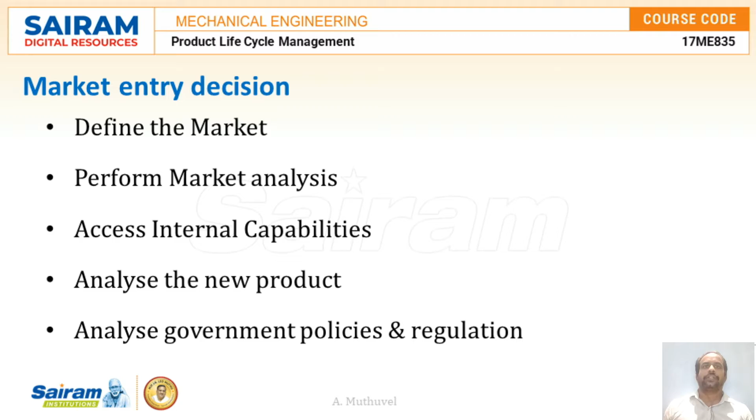The following are various factors to be considered by the managers when making a decision for entering the new product into your domestic market. First, we will discuss defining the market. That means who is your customer, what you are going to sell. So that factor has to be defined properly.

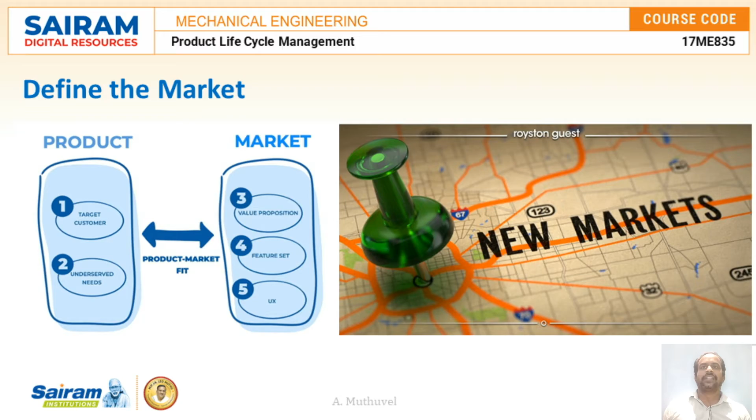Defining the market implies identifying the market in terms of location, having a suitable population with a large middle class representation and income level above the national average, people's characteristics, their needs and wants, educational backgrounds and other necessary information for promoting products. So this step is critical because the information that appeals to one particular sector of the population may not be as effective with another.

Now we are going to discuss performing market analysis. Expanding into a new market involves a great deal of market research in addition to target customers. There is a need for an in-depth understanding of market growth rates, market size, forecast demand, existing products and level of competition, distribution and supply channels, advertising channels, potential risks and barriers to market.

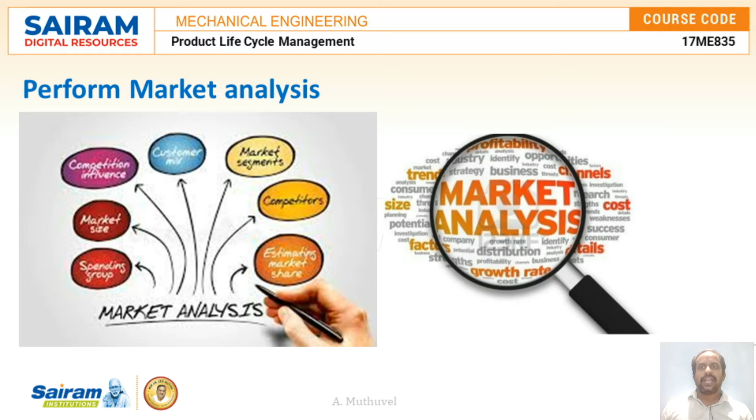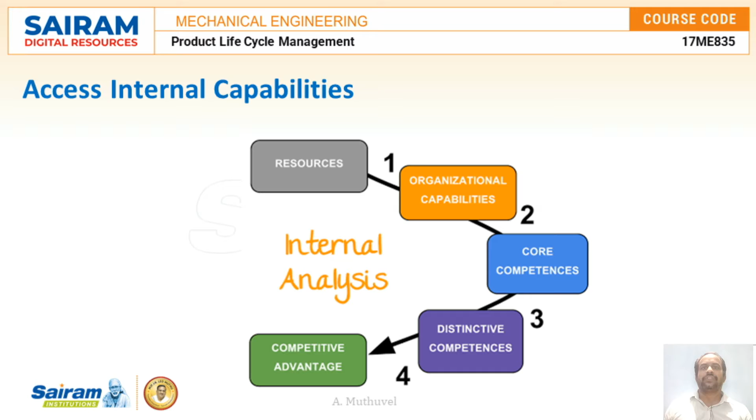Now we are going to discuss assessing internal capabilities. Much of your decision on how to enter a new market is driven by an internal capabilities assessment. There is a need to analyze the existing financial situation of the company and future requirements, human resources with skilled and efficient people, existing infrastructure and future requirements, company presence and association with the distribution supply chain, getting associated with a joint venture or partnership and so on.

Now we are going to discuss analyzing new product development. There is a need to compare the features and functionality of the new product with those existing in the market, modifications if any to overcome the limitations of the existing product and attract new customers, the overall cost of making the product, and fixing a competitive product price along with product discounts or offers, if any, and so on.

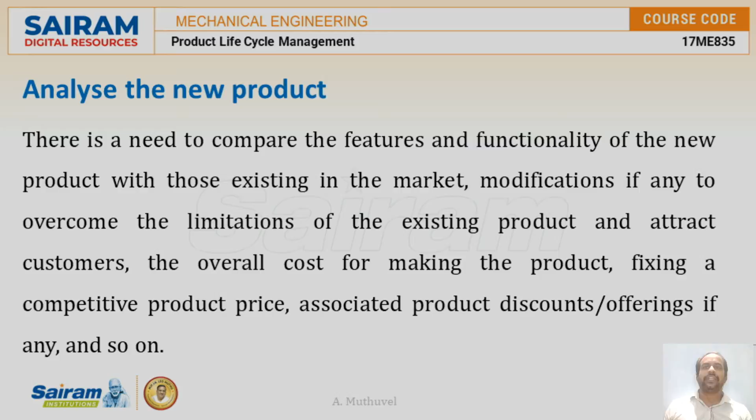Now we are going to discuss government policies and regulations. Government regulations can very often create barriers to your business at the entry and growth level. Companies need to examine the implications of such regulations prior to committing to market entry. Now I am going to play a small video for your better understanding.

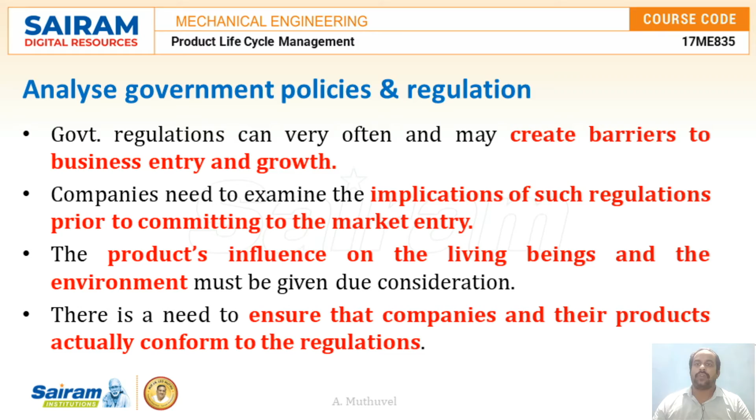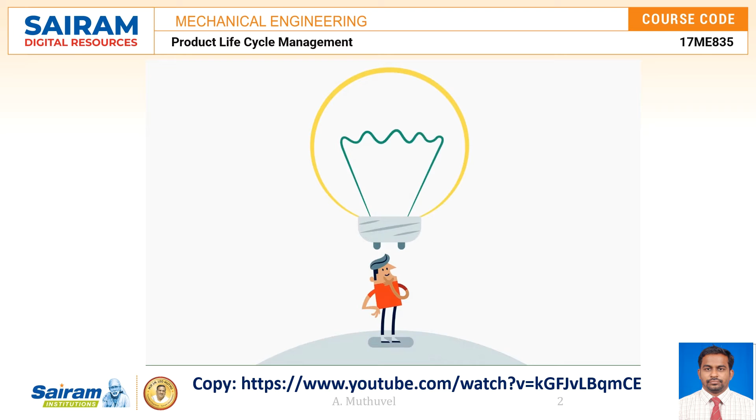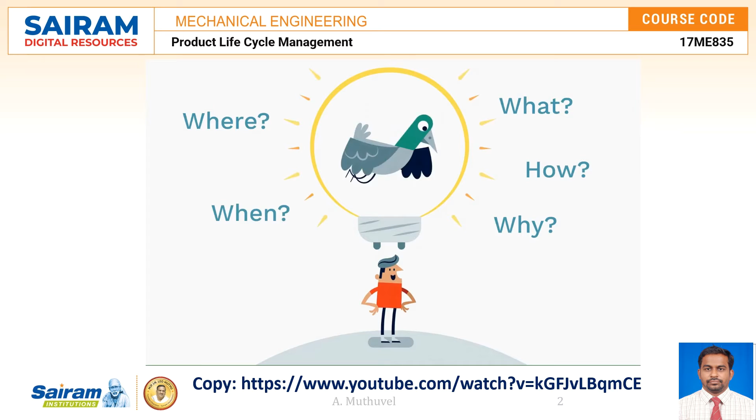Product development consists of several phases, all equally important and exciting, and all with the goal to create something new. A product always starts with an idea, followed by important questions like why, where, what, when, and not least how. When the concept is set, it's time for research and analysis. We will help you identify the challenges, growth potential, and compliance of your product. When all parameters are set and analysis complete, you are ready to start designing.

We have the experience and knowledge to help you decide the right design early in the process. It will save you time and money. Next up is prototyping, one of the most exciting phases in the product development process. Are all parameters covered? And will we meet the deadline? When volume production kicks in, we will make sure you are in good hands.

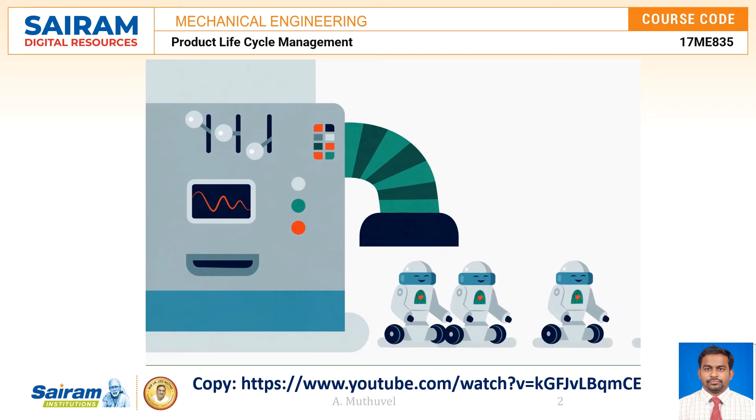With transparent documentation and manufacturer audit, we secure your delivery. Your product is now ready for launch and global distribution. Our global delivery platform and experience with documentation, regulations, and compliance provide you with security and allows you to focus on other things, like developing new products.

We know what is possible, cost-effective, legal, smart, and the best for the heart of your electrical product, the PCB.

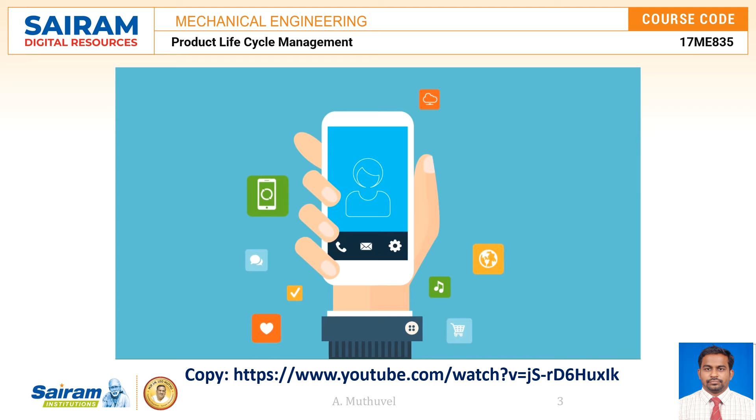You have an idea for an awesome new product. You know how many you can sell per year and at what price. And you've started putting together a budget for the upfront design and production costs. How do you take your idea and make it a reality?

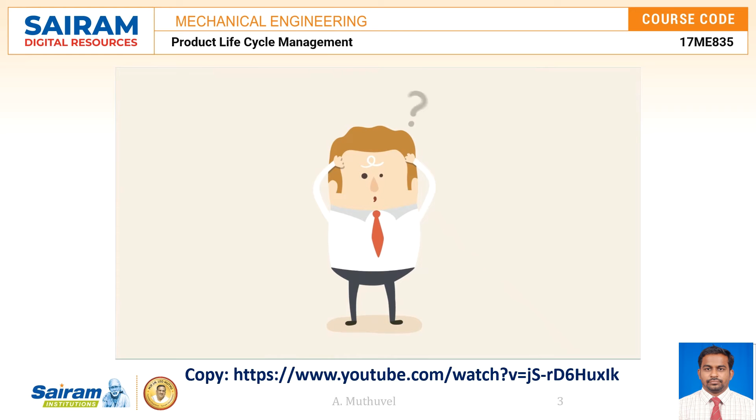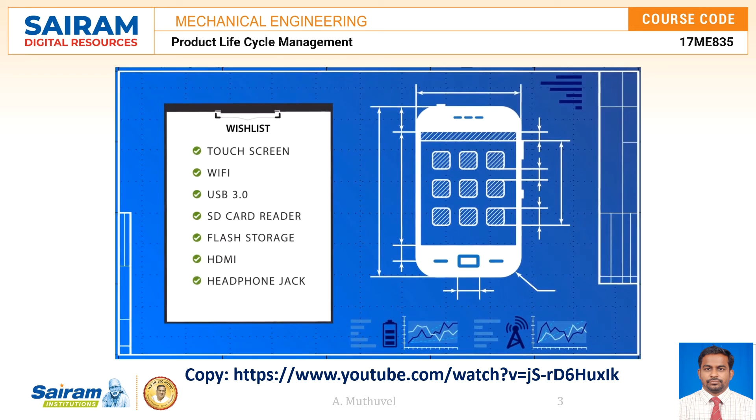First, you'll need to write out your wish list in as much detail as possible. Make sure to prioritize by putting key features at the top. Now you can begin sketching out your initial idea and further refine your wish list. Once you're happy with your sketch and have determined the product's core functionality, you'll need to team up with industrial designers and engineers.

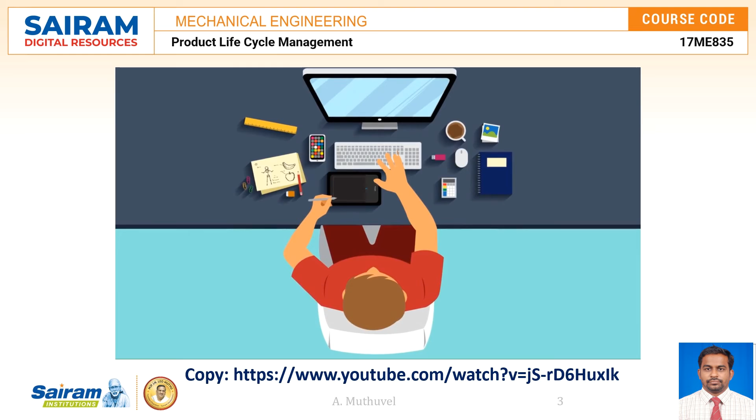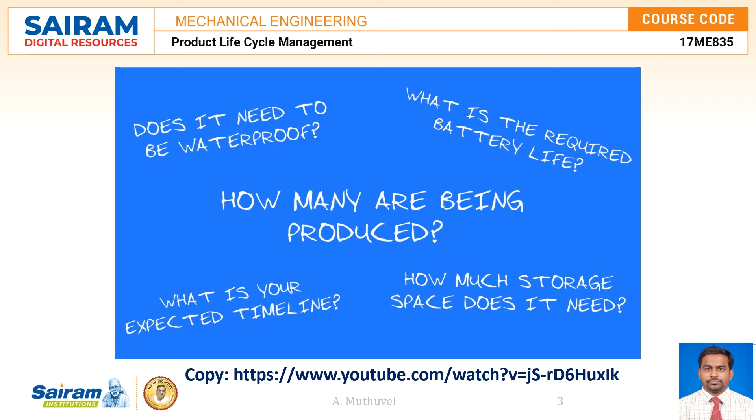The industrial designers work on the product's look and feel and ergonomics. The engineers work on the functionality within. Both teams will have questions and will bring up any concerns about your wish list. Now that the functionality of the product has been fully determined, the designers and engineers are ready to move forward.

The designers begin sketching ideas and planning for the case design. Engineers begin by creating a proof of concept using off-the-shelf development kits and ready-made modules. Any risky components are identified and tackled first. Next, the engineers need to create a schematic.

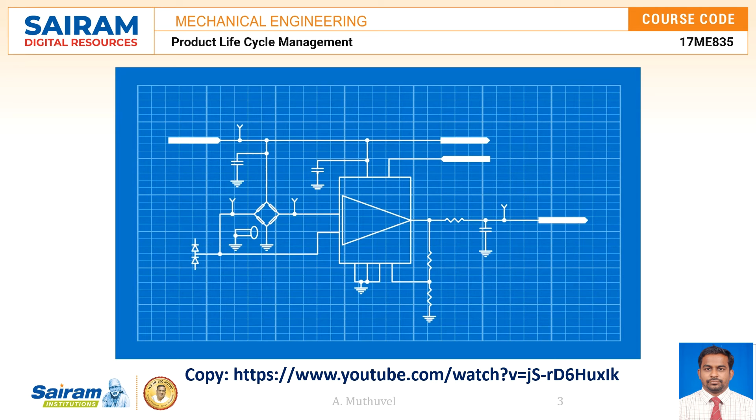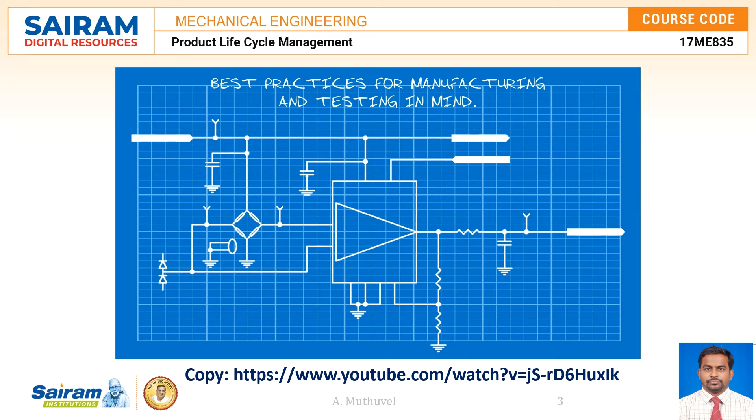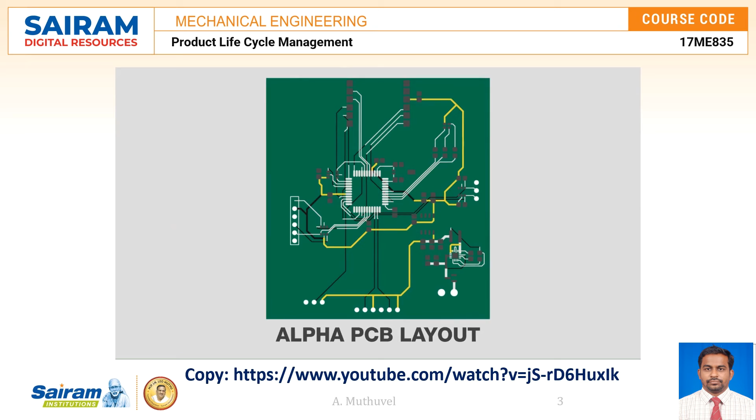During this phase, we incorporate all the components required to meet the specifications, while keeping best practices for manufacturing and testing in mind. Once the schematic is finalized, we begin creating the Alpha PCB layout. Up front, we'll determine the layer count for the board, optimizing the balance between cost and performance. The Alpha is the first revision of the design that will be built.

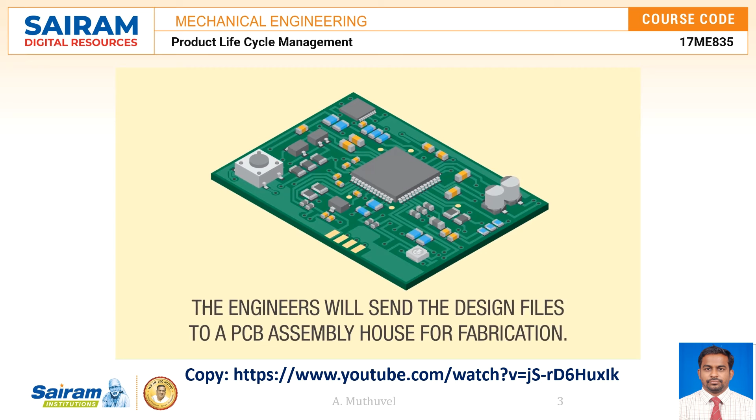Alpha boards are usually larger to facilitate field changes, and they often include lots of extras like test points and debug headers for troubleshooting. When the Alpha design is complete, the engineers will send the design files to a PCB assembly house for fabrication. Prototype board fabrication can be a lengthy process, typically taking 2 to 4 weeks. Depending on your product timeline, it can be expedited down to around 1 week for an additional cost.

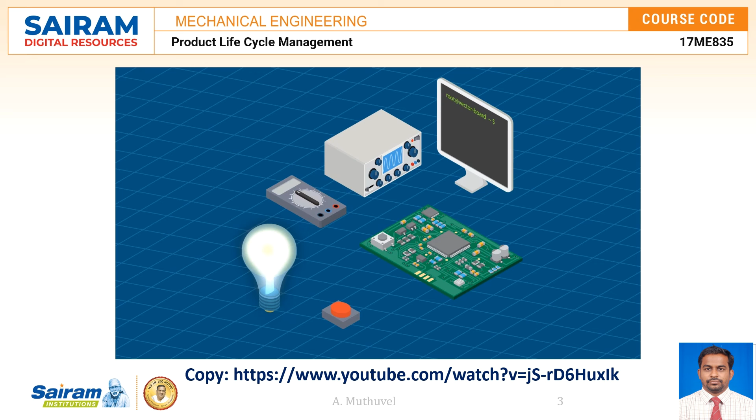When the boards arrive, engineers carefully apply power and begin running electrical tests and executing test code. Each engineer gets a board they can then use for development and testing. The designers also receive a board to see if their enclosure needs any design refinements. Once the engineering and design team are happy with the initial development, they'll send you a working prototype.

This part is highly collaborative. There will be lots of web meetings, making minor adjustments, and planning for the final design. Once you're happy with all the new design ideas, the engineers incorporate them. After a revision or two, you now have a fully functioning beta prototype.

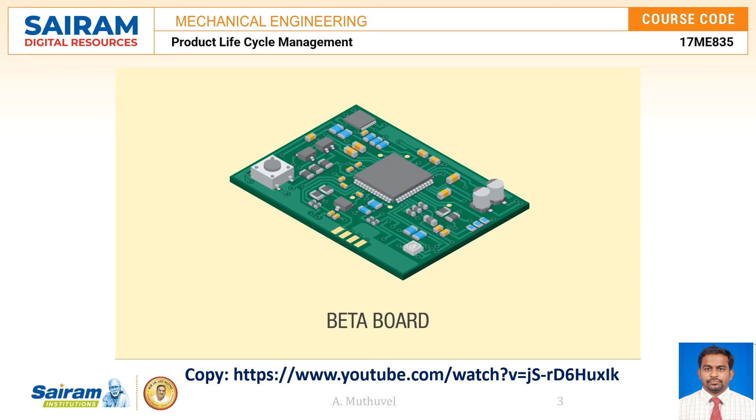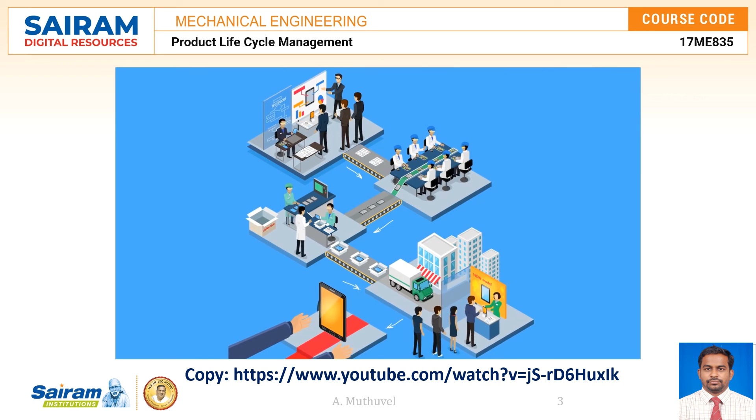Depending on your product, the next step may be to send it to various test labs like UL to get approvals. The engineers can help guide you through this phase. They can also connect you with a volume manufacturer to produce it. If you're ordering a high volume, you may need a production calibration or test fixture created. Now your product is in the user's hand and you've made your idea a reality.